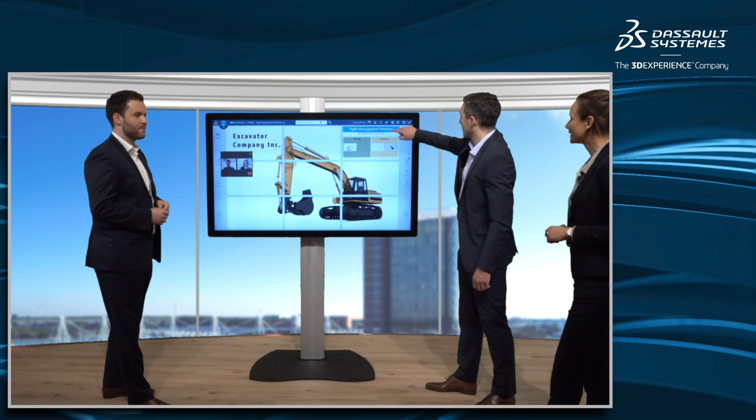But now, let's join the ongoing management meeting and see how to deal with an innovative new customer requirement. At the start of our scenario, the company holds their weekly Agile management stand-up meeting. The objective is to align between all participating departments: sales, supply chain, manufacturing, engineering, and production. They start by defining the agenda for the meeting, and to stay on time they also set an objective for the meeting's duration. In this meeting, two participants are joining remotely and contribute by collaborating online through the platform.

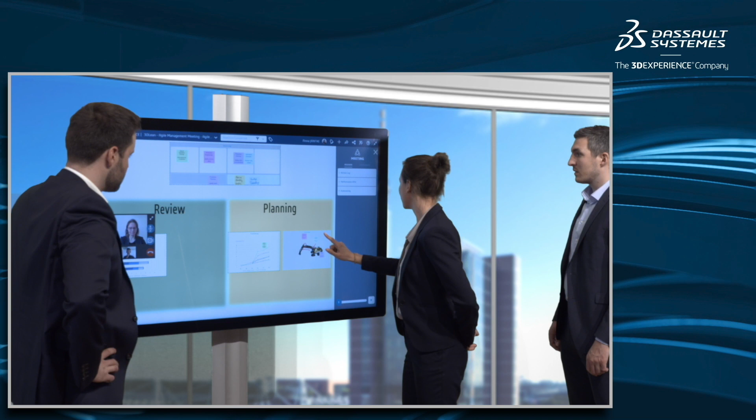As the first part of the meeting, the retrospective view, the conclusions and actions derived from the previous meeting are reviewed and discussed based on an action log. For this purpose, the owners of the tasks update the status of their actions and present the relevant outcomes of their completed activities. Following that, they take a look at the performance of the organization.

Based on the KPIs and the trends apparent from the charts, the team can immediately discuss and decide on actions they need to take. Once the review is completed, the next item on the team's agenda is to update the plans and forecast for the coming quarters.

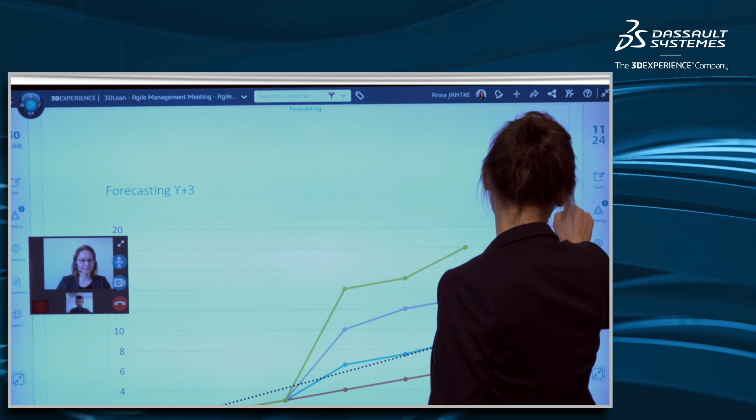During the discussion, the field sales manager informs the team that a customer has requested if a new variant of an existing product can be supplied. As a first step, the team discusses the business potential and concludes that a more thorough analysis is required, for which they create an action. The actions defined here are automatically consolidated in the action log, which helps the team keep an overview of all tasks and responsibilities.

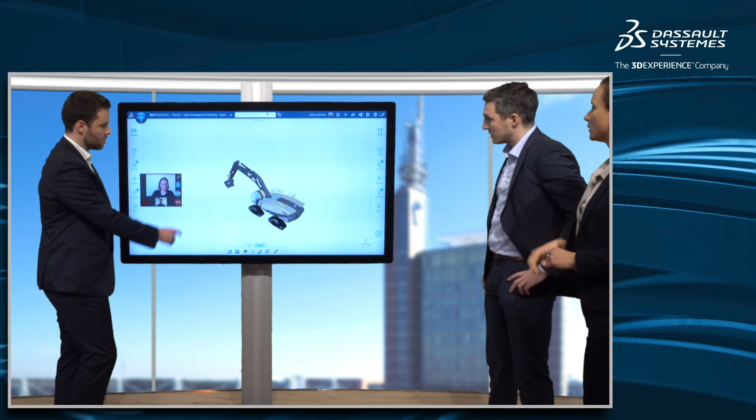As a next step to reply to the initiative from sales, the team decides to have a closer look at the 3D model of the product to see which modifications are required. They conclude that the customer request appears to be an interesting opportunity, but the implications for the production process and plant utilization need to be clarified first. For this purpose, they create tasks to ensure manufacturability of the new variant and assign the tasks to the respective manager.

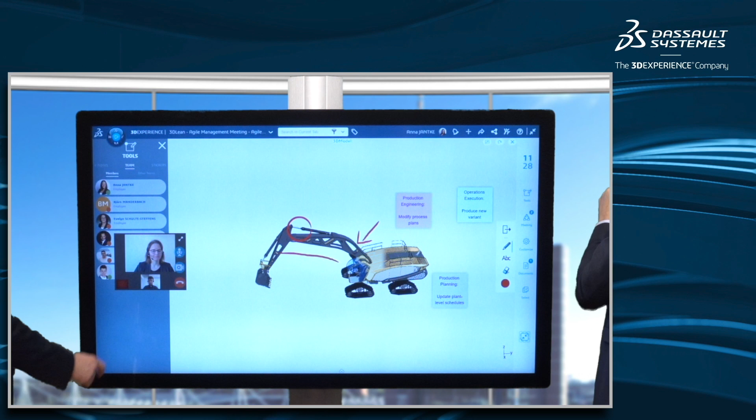To conclude the meeting, the team looks at the identified actions and discusses the timeline so that a response can be provided to the customer and production can be ramped up.

So you have just seen a management meeting in which sales brought forward a new request to supply a new customer-specific variant. We will now see the first step triggered by the customer request, which is sales and operations planning.

This is an activity performed in my department, the technical planning department. The goal of this activity is twofold: firstly, we want to verify that the new opportunity is economically viable; secondly, we have to ensure that sufficient capacities are available in the supplier network. In the following part of the workflow, we show you how our solution can support you to achieve this objective.

At the start of the sales and operations planning, the demand planner captures relevant information in the collaborative forecasting process. All characteristics of the opportunity known at this point are identified for further tracking, to enable a statement about the final revenue and profit contributions by the opportunity. The demand planner therefore configures the parameters, such as the probability of successfully converting the opportunity, planned due dates, and amounts for delivery over multiple periods.

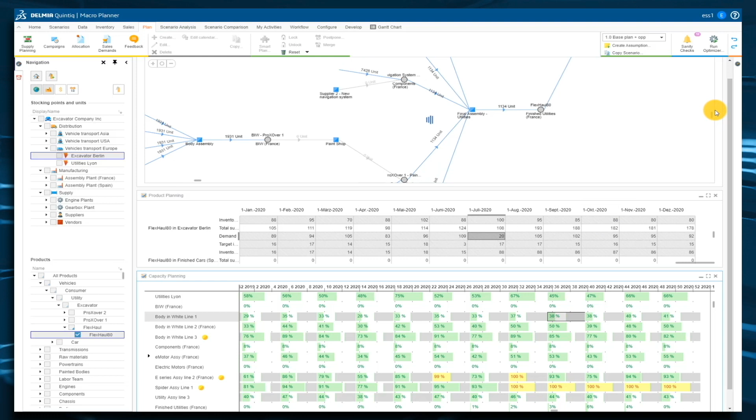Our new opportunity is considered with the appropriate priority, respecting finite capacities and limited supply quantities across multiple operations and sites. The supply plan reflects the allocated demand and supplies across the entire network to fulfill the new order. This provides full visibility on planned production, inventory positions, and transports from the initial delivery of parts and components until the final assembly. To maintain the global optimum, the plan is steered and expressed by global KPIs.

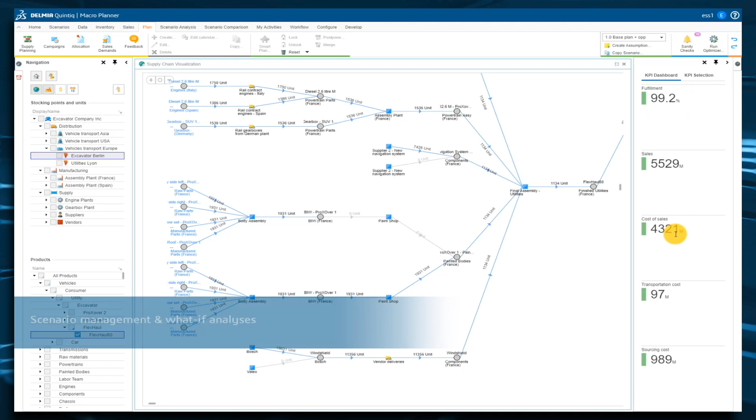Here we see how multiple scenarios can be created and compared to support make or buy decisions. The performance of each choice is represented by its individual effect on the KPIs.

Comparing scenarios also supports in making informed decisions based on facts and figures. You can explore the trade-offs between KPIs such as fulfillment rate, revenue, and cost to identify the most suitable business decisions. Hence, the solution puts the supply planner into the position to choose the best allocation of the new opportunity in the company's supply network.

Accordingly, the sales rep can get back to the customer with a matching offer. As soon as the customer accepts this offer, the opportunity is no longer an opportunity, it is now an actual customer order.

Now that the first due dates for production and delivery are approaching, the factory planner has to make sure that the entire supply network runs in sync to fulfill the order on time, from suppliers to component plants to the final assembly.

The planner keeps track of dependencies between operations and materials, considering production timings, transport lead times, and supply confirmations, from incoming parts to in-house production of components to the final assembly. The system automatically replans dependent steps in case changes occur, respecting finite capacities, and flagging alerts in case of conflicts, so that the planner can initiate measures on time.

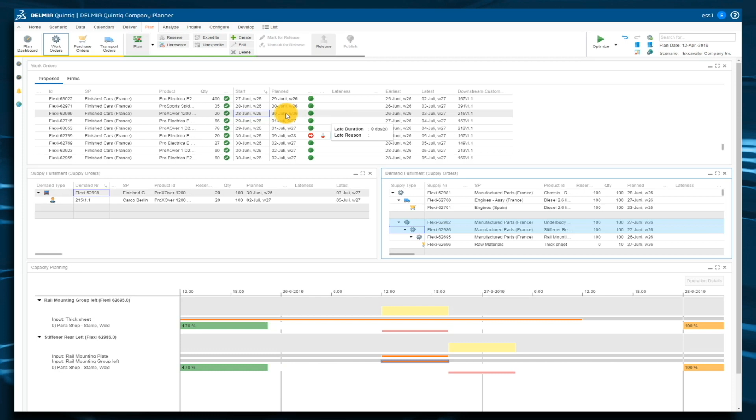Luckily, all steps for the new crane variant are on track. Also, the overall situation in the particular week of production seems well balanced and gives the confidence that the ordered products will arrive at the customer as promised.

You have just seen the first step of our scenario. Using the S&OP solution, we could verify that, from a business perspective, the new variant requested by the customer can be produced with positive net worth. Moreover, we verified that the required capacities across the entire supply network are available and developed a schedule that orchestrates all tiers of the supply chain to fulfill the order.

We could hence confirm the customer request for a new variant and make an offer, turning the opportunity into an actionable customer order.

Now, before starting with the production of this new variant, we have to verify that the process plans for the operators are still okay or if something needs to be adapted.

Therefore, we will now take a look into the manufacturing engineering department and see how the process planner deals with the new product variant. Once the changes in the product design have been modeled in CAD solutions like CATIA or SolidWorks, the Delmia portfolio allows you to virtually plan, simulate and validate your production processes and manufacturing assets before you actually start with your production.

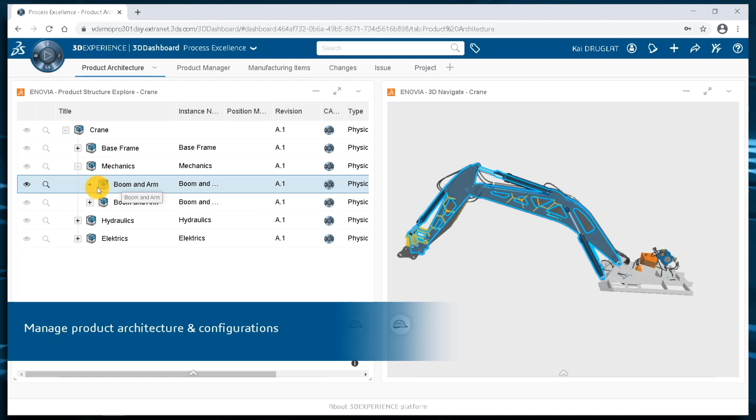For the given scenario, we start in the role of a product manager to look into the product structure and to define the new product configuration as requested by sales.

The new product configuration is based on an existing product but has a couple of changed components. Here we see how the new configuration is generated from the existing product. In the background and not visible to the user, automated checks are applied to ensure that the new variant is valid.

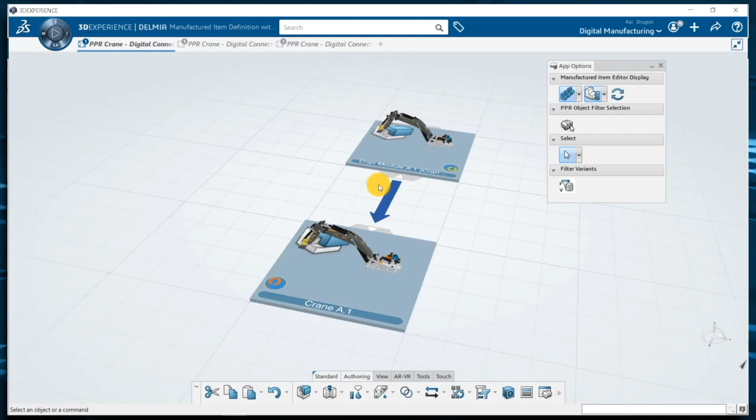With this new product configuration, let us now take a look at the Manufacturing Bill of Materials, or MBOM. You can derive the MBOM directly from the CAD model of the excavator and display it as a 3D graph of the assembly sequence.

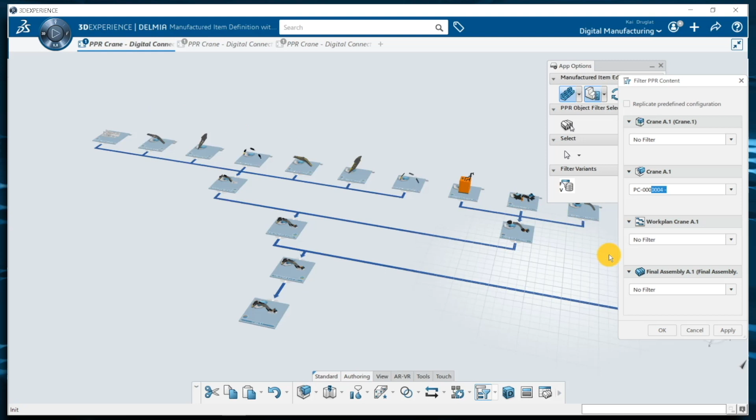We now use the newly created configuration to reduce the manufacturing bill of materials of all configurations to the actual components of the new configuration.

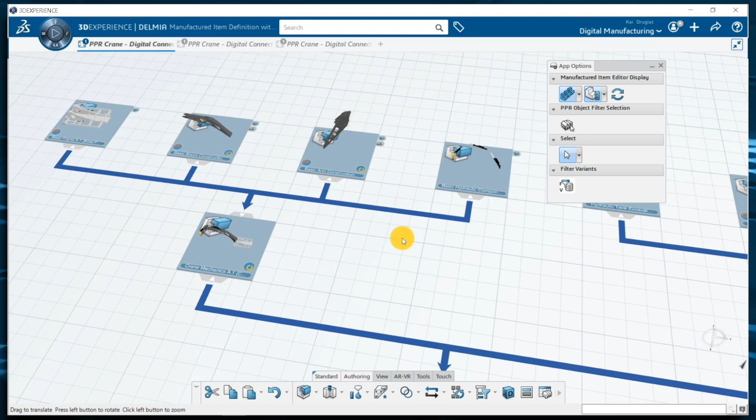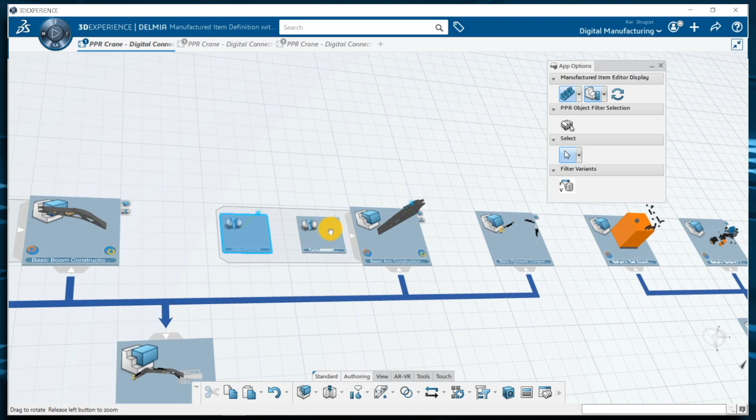In this way, an initial visual verification of the processes and components can be accomplished quite easily. In addition to the materials used, the engineering department can transfer further technical information along with the CAD model to be displayed in the manufacturing bill of materials.

In this example, we see that two different assembly technologies should be used: point welding and seam welding. Together with the assembly sequence of the product captured in the manufacturing bill of materials, we move on to process planning.

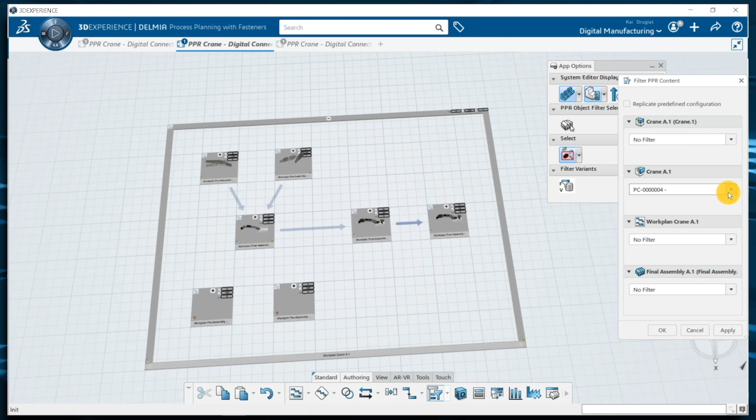Similar to the manufacturing bill of materials, you can also filter the process plan shown here to only display processes used by specific configurations, as we did here for the new product variant.

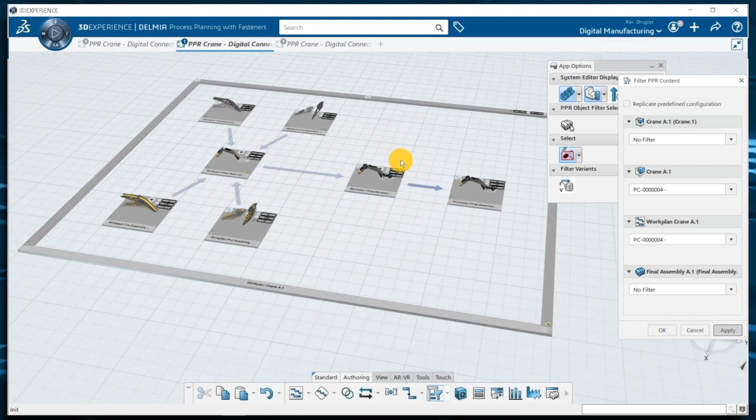Now, we have to define the assembly sequence and add more details to the process steps, such as the time required for assembly. Once we have provided the detailed process duration for each step, we can carry out workload balancing and visualize the result in this Gantt chart.

With the manufacturing bill of materials and the detailed process plan, we can proceed to the next step, which is generating 3D work instructions.

Here, we navigate through the process and select one of the steps to generate the work instructions for this operation. After selecting the step, the 3D view automatically builds up the right scene based on the information from the product flow and the manufacturing bill of materials.

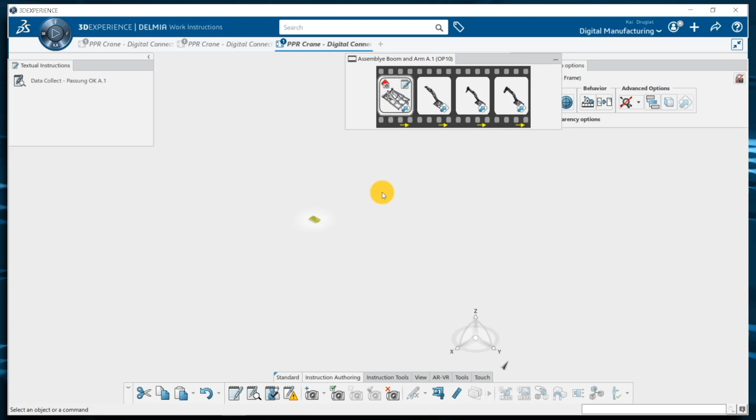Here, we see different views of the 3D model proposed by the system. We can now add further information to these views, such as material requirements specified by the engineering department. This information will be used later on to guide the operators when executing the production process.

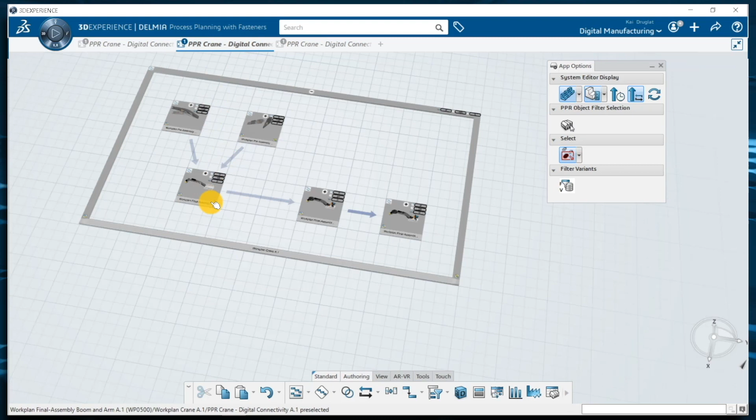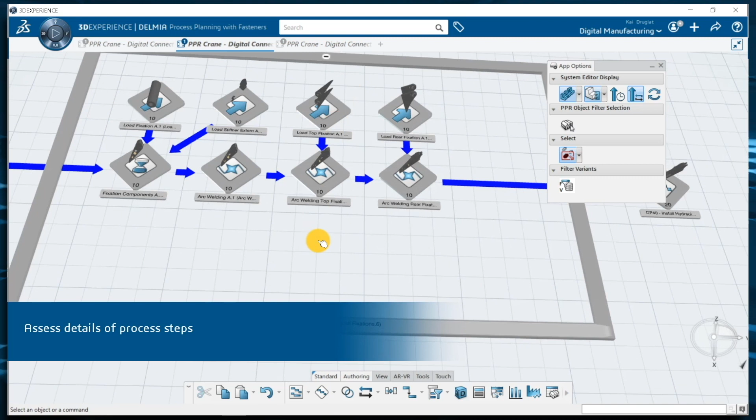But back to our current process planning, where we now take a deeper look into the welding processes. Here, we link the process steps to specific resources, all based on one consistent dataset and without needing multiple dedicated systems.

Here, we add the technology information to the process step, describing the required seam weld. This information will be relevant for our robotics specialist.

Now we compute the process model of the product with all the technical information, such as the welding seams we just defined, but also the position and orientation of the part to be produced.

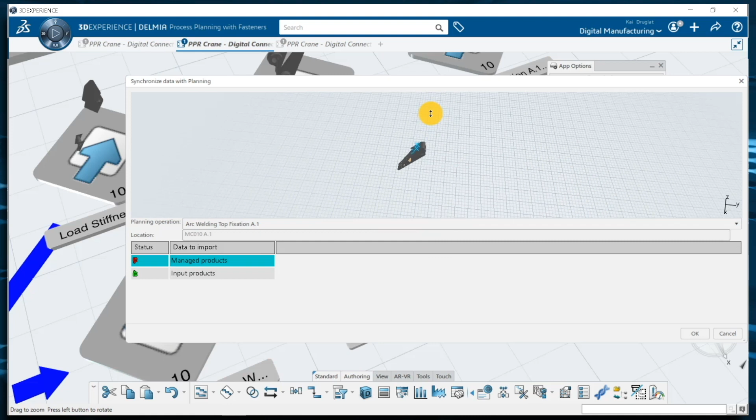Now, let's jump into the role of a robotics specialist. The robotic welding cell you can see here was also designed in this application.

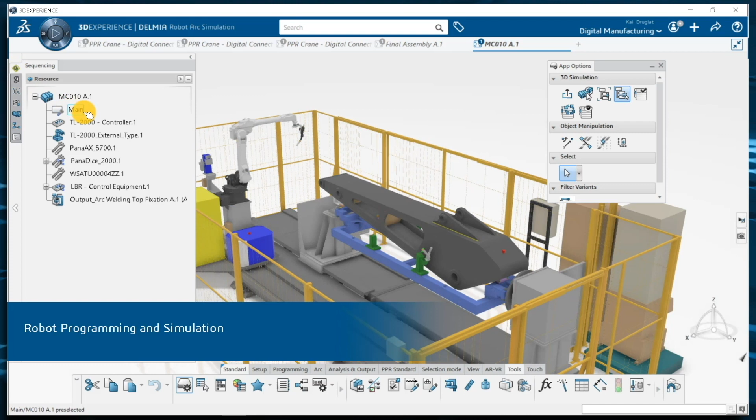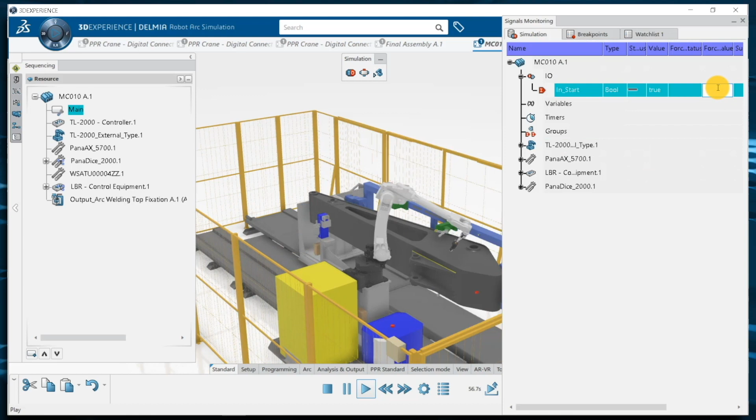You can create a robot program that we can simulate and validate in the welding cell, which you can then download and send directly to the real robot controller. Our solution hence enables you to perform virtual commissioning and signal handling, supporting you in efficiently preparing your automated assets.

This concludes the steps of the end-to-end manufacturing operations engineering. You could see how the entire process engineering workflow can be performed on one single platform with one single user interface and based on one single dataset, which makes this collaborative process not only fast but also very efficient.

At the same time, we keep full traceability of the information from the technical parameters of the original product design until the very end with the robot program for producing the new product configuration.

Now, with the modified process plans, work instructions and robot program, we are ready to ramp up production in the plants.

Now, as last step, before we are able to produce the new variant, we need to include the order in the production schedule for the shop floor.

Similar to the planning on supply chain level you have seen before, the goal here is to come up with a feasible schedule which takes into account capacity constraints with regard to machines, tools, and employees, as well as our KPI objectives. And the planning should not only consider the actual production process, but also the logistics, quality-related tasks, and eventually also maintenance activities.

So in the following part of the workflow, we will give you an idea of how our solution supports you in achieving this.

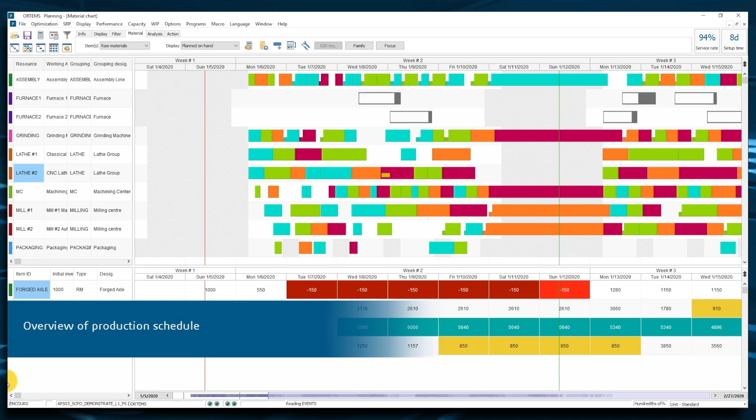This is the view the production planner sees when opening our solution for the planning and scheduling on plant level. It displays the plan for executing the production orders across the resources and machines in the plant. Each resource is displayed as an individual row, and each block in the rows represents a production operation for an order.

The network of production operations of a specific order can be revealed easily for intuitive understanding of the dependencies. The right top corner of the screen displays important key performance indicators to support the planner with immediate feedback about the quality of the plan.

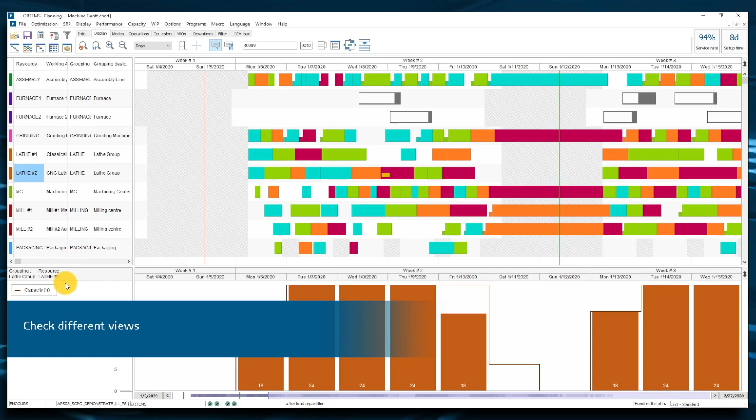As you can see, the current schedule yields a service rate of 94%. If the planner wants to check the planned utilization rate of an individual resource, our planning and scheduling solution offers the capability to display this in a detailed view.

Alternatively, the planner can check the utilization rates in the resource overview. The yellow marker on this operation informs the planner about a new schedule element, our new product variant.

Before modifying the production plan, the planner saves the current simulation scenario. This enables a comparison of the previous planning against the modified plan.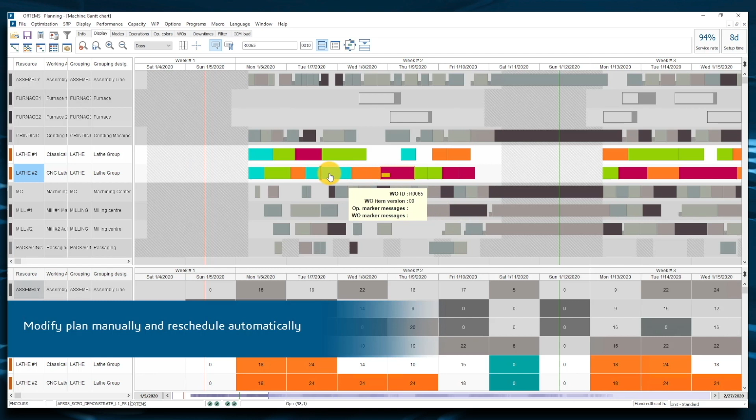The planner wants to avoid unforeseen challenges with this new variant and decides to execute this operation earlier by dragging and dropping the operation in the plan. The solution provides visual support showing which resources this operation can be assigned to.

As displayed in the top right, executing this operation earlier will decrease the service rate to 91%.

To determine the optimal production plan with this early start date, the planner pins the operation to its position in the schedule and starts the optimization. As a result of the optimization, the service rate of the plan is now at 93%.

Since the service rate is not the only relevant KPI, the planner saves the current simulation scenario to compare it to previous simulation runs based on multiple KPIs.

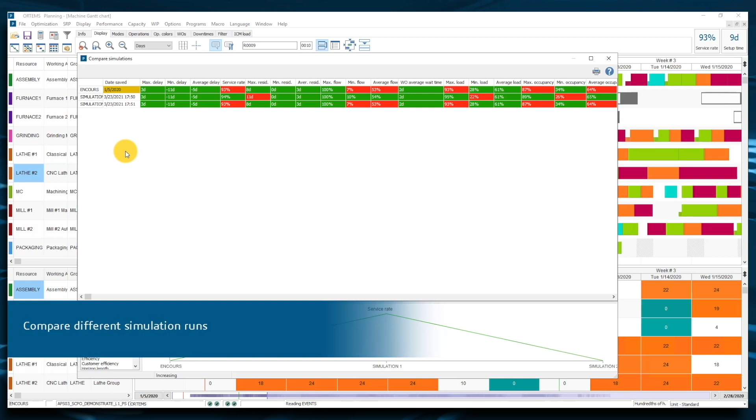This is accomplished by opening the performance comparison that displays all saved simulations and their respective KPIs. Next to the overview of simulation runs and KPIs, individual indicators can also be intuitively compared in the charts below.

In the table view, the color of the KPIs helps to determine the most suitable schedule.

With the capability of the Delmia planning and scheduling solution, the planner can perform multiple what-if assessments and find the best overall opportunity for producing the new variant.

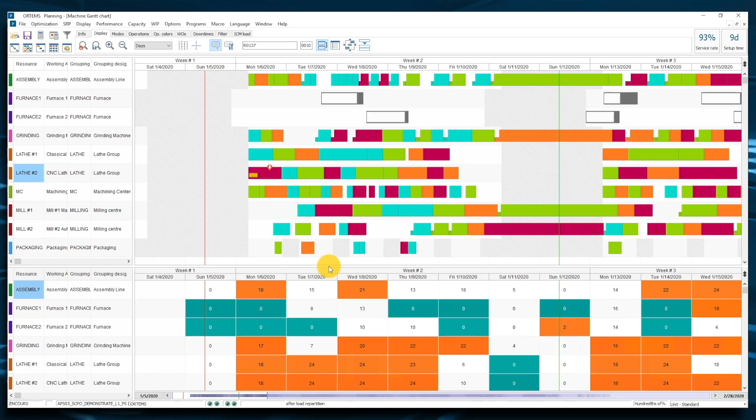We have just seen how easy the complex task of scheduling can become when you have the right tools. It only required a few clicks for the planner to include the new variant into the production schedule.

You could easily see how the solution helps to make sure that the new variant can be shipped to the customer on time, but also to keep the effort for planning to a minimum.

As all production steps and resources are now planned, we can proceed with the execution of the order on the shop floor.

We also provide solutions for process execution that help you perform your shop floor operations in an effective and efficient manner. In the manufacturing execution domain, our goal is to ensure that all operations, be it in production, maintenance, logistics, or quality, can be integrated and executed seamlessly.

For this reason, our solution can be opened on any type of device, from handheld to desktop PC. The following part of the workflow will give you an impression of how our solutions can support the operators in producing new variants.

As a first step of producing the new product variant, the operator logs into the solution. What is shown first is a list of tasks that is ready for execution.

The operator selects the first operation, which belongs to the new variant, and directly proceeds to the work instructions that illustrate the first production step.

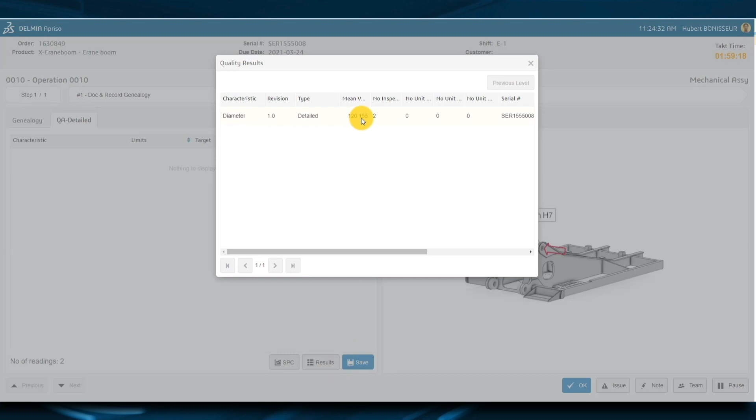To confirm that the quality meets the specifications, the operator receives an overview of the recorded values.

For more detailed information on the performance track record, the operator can view the history of recorded values also in the form of a configurable chart for statistical process control, or SPC. This enables all team members to take corrective actions when needed.

Once the operator is finished, the operation is reported complete along with a qualitative result, which is good in the shown case. Before starting the next production step, the operator checks the required components.

As indicated by the font color of the component list items, it becomes directly apparent that the first component required for the assembly is not available.

To obtain the missing component, the operator issues a replenishment request, which is sent directly to the warehouse for picking.

Now we jump into the role of a warehouse operator, who is supported by the solution on a mobile device. The scanner shows the picking order that was created by the replenishment request.

The warehouse operator starts the execution of the picking order and is directed to the right warehouse location to pick the needed components. The operator confirms the container in which the part is stored.

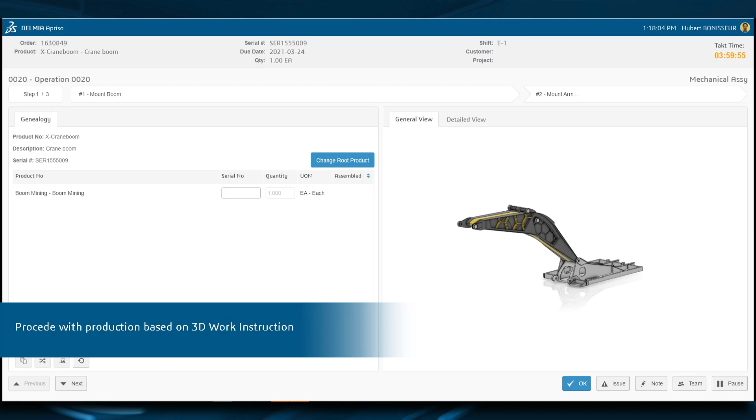Also in this step, the operator receives support for producing the new variants in the form of work instructions that were created in the process engineering solution shown previously. In each step of the assembly process, the solution supports the operator by providing intuitive visualization.

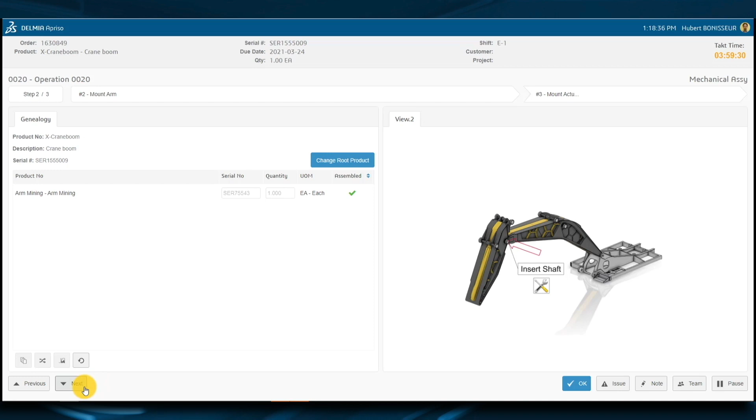In this operation, the operator collects all genealogy and traceability related information and assigns it to the production order and unique ID of the manufactured product. This delivers a solid database for achieving high-quality products and continuous improvement.

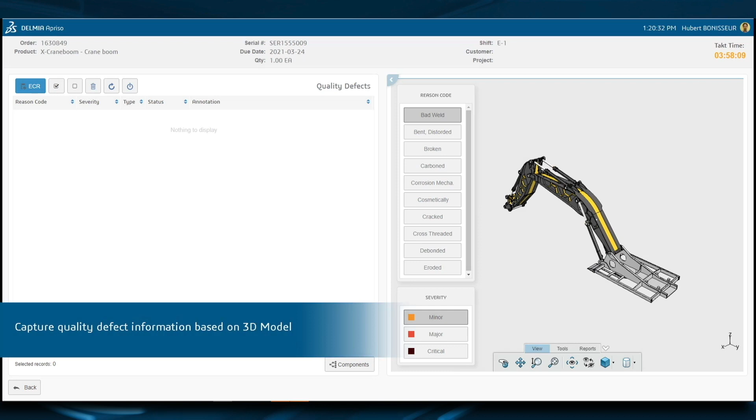Nevertheless, even in case of unplanned quality deviations, the operations management solution supports the operator to report quality issues. Among others, quality issues can be communicated visually based on a 3D model of the product. Quality issues captured in this way and other information can be easily fed back to both the product and production engineering departments.

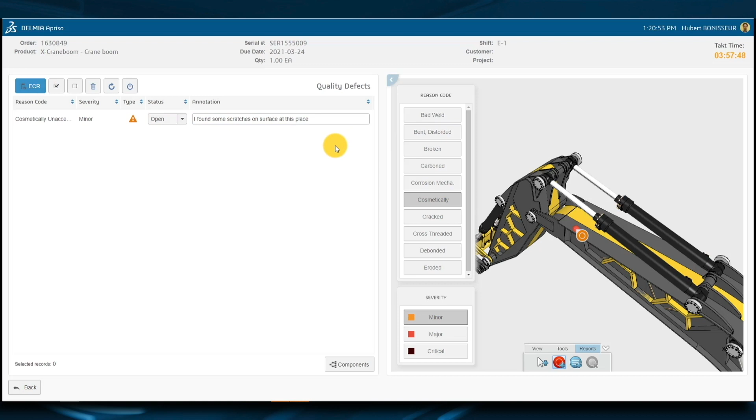In this case, we can see that the operator provides additional information on the detected issue, including its category, which enriches the information base for future quality improvements.

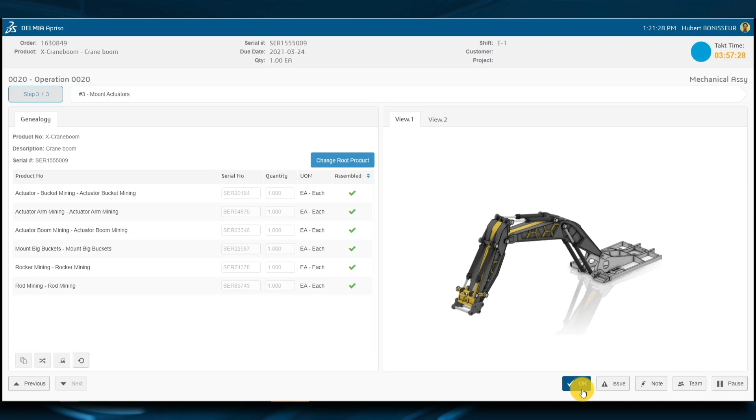Eventually, the worker reports the operation to be complete. This will trigger an update of the order status in the ERP system. The production of the new variant is now finished and the product can be delivered to the customer.

As the last shop floor activity, the operator creates an electronic manufacturing report and attaches it to the product. This configurable report contains all parameters captured throughout the production process and therefore can be used to prove the quality of the final product.

So this was the last process step of introducing a new product variant, which is now ready and can be delivered to the customer. We have seen how our solutions enable you to involve different functions in production into a streamlined process, covering the actual production process, but also quality and logistics.

In fact, this was just a small fraction of the opportunities our solution provides you in this domain. We also saw the connection to the previous steps, like production engineering.

We saw the work instructions, which shows how information and documents from the process planning activity can be integrated in the execution. But we also saw how information captured during production execution can be fed back to the engineering departments in a way that is very easy to understand.

This is the right time to leave our scenario. I am very certain that in the next management meeting, the corresponding activities can be reported as successfully completed. And once again, the proven customer focus will leave an impact in the marketplace.